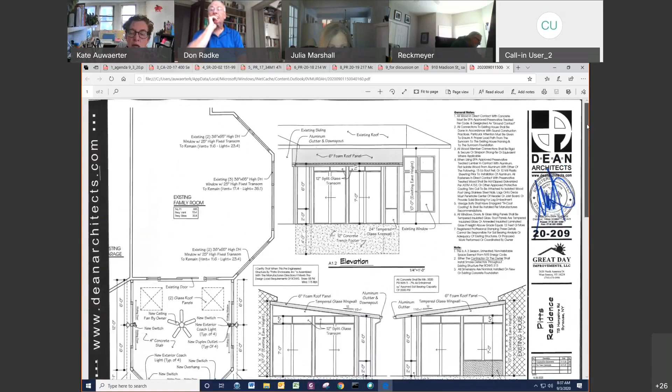This is the revised information that was just sent to me. I think the revision should be the A22, I believe, was in question. A22 is here, on the angle wall. Okay, there it is. Well, that's A2. That's A22 right there. No, it says A2. Oh hold on.

Let me move it down a little. Can you see that on your screen? You can't see the connection at the house. Can you see that on the lower left-hand corner? It's detail A22, sheet A2. Yes, we can see it. Okay, so there's A1. There we go. A2, and that's it, can you see it?

You can see A2, but can you zoom out a little bit because I can't see the whole drawing. Okay, I can't see A2 either. A22 is the detail, A22 is the detail. Okay, why don't we let the applicant walk us through it?

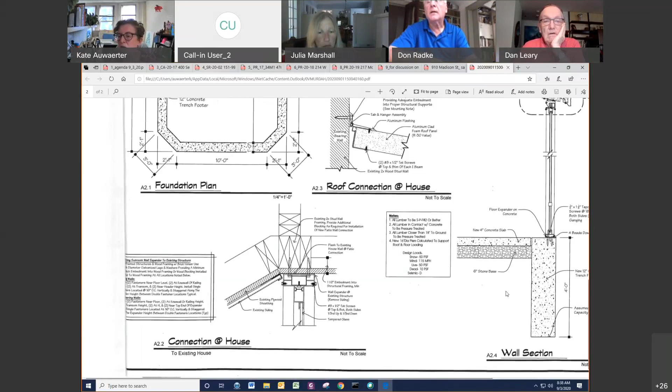Okay, well there was a question as to how we were going to attach at that angle wall. So this detail just shows that we're going to attach to the straight wall, and then it's just vinyl siding and everything, so we'll put flashing in there and bring the siding over to the wall. I think probably the question is more so, can we look at it in plan, not just the detail, but also the plan connection of where you're suggesting this is happening.

So these are the drawings that they submitted. I don't know what view you'd be looking for. Okay, well that shows it right there. Right here. Yeah. Okay, and the opposite end right on the corner. This is what we're looking at right here.

One of the questions is where the connection met, on the driveway side there was a sliding glass door there. Is that still there? That seems to be opening into an angle wall. It's not going to work. Right here. Yeah.

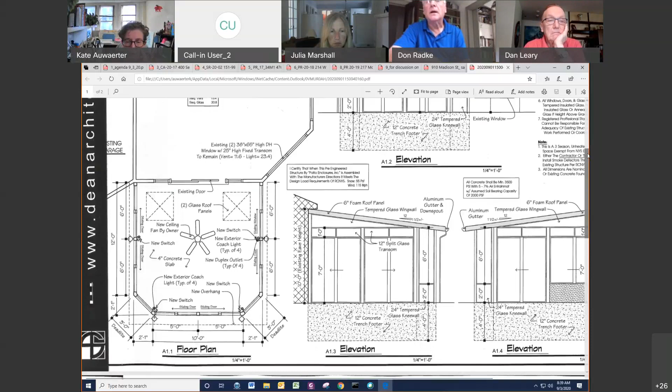Can you speak to that please? Yeah sorry, I had the mute on. Well, the door slides from the middle back, so the wall isn't on a super sharp angle, there's a whole patio they have off on that side. I see, I see, okay.

Is there a site plan? No, let's see here, the site photograph from last week. Yeah, there was one submitted, I know that. There was a site aerial.

I'm not so concerned about that connection, he's showing a good detail. It's really what happens at the roof line, the connection. Let's go to the overhang of the existing roof line. You had the detail there, let's go to the roof line. You have an overhang from the garage, I assume.

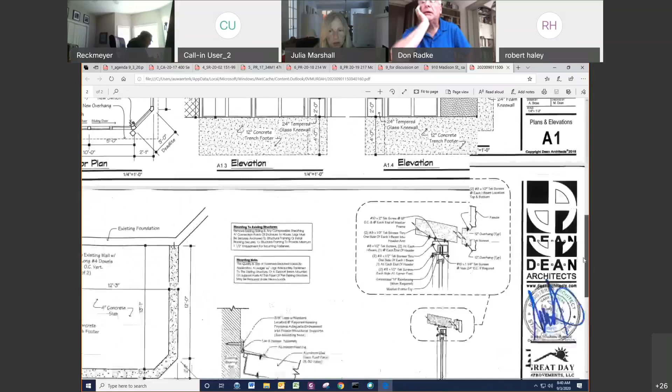And this is sitting underneath it. Yes, we're mounting under the overhangs, so our overhang will just get cut on the angle, so it ties into that roof, and then it all gets flashed. But we're under the overhangs, we're not cutting the overhangs off or anything.

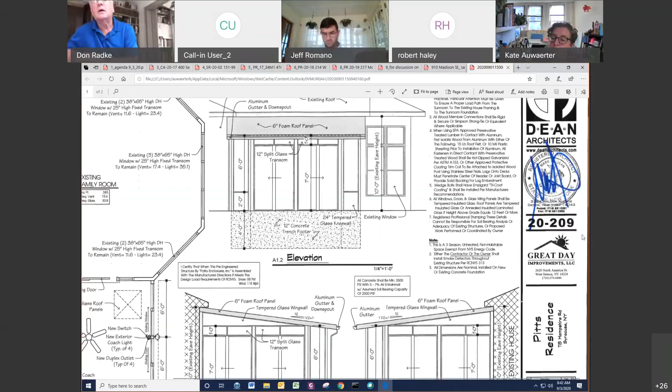Board members, let's discuss how this impacts the character of the house. Let's just keep moving on this and do our charge, which is how does this impact the character of the house?

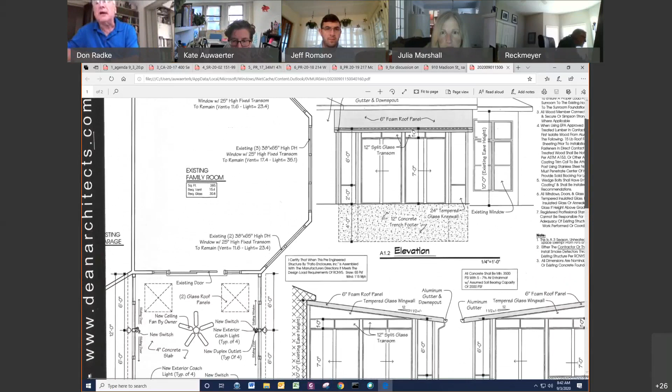I think there can be sort of a caution to the owner about the concern about that corner, but that's a caution, correct, and a caution would be fine. But in terms of the materials and the construction of this addition on the addition, well, the character of the house - I can state that this is inappropriate to the character of the original house in the sense that it's a prefabricated sunroom, and the materials and the shape and character of it is not in keeping with the original house.

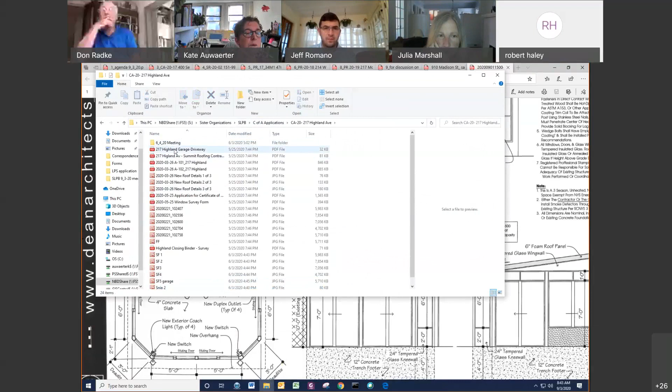Do you have pictures of the original house? Do you have photos that you could put up? Yep, please. Let's see here. I'm speaking to the applicant - is there vinyl siding on the house now?

I actually stated that it was vinyl, but I believe this is clapboard. I misspoke earlier, I said it was vinyl, but looking at the photo, it looks like clapboard. The detail provided shows the J channel as if it were vinyl. Oops, wrong application - here I am, 115 Hampshire, here we go.

This is feeling that it's inappropriate due to its material. Does anybody else have comments? I just want to see the photographs before - let me see if I can find those photos for you.

Yeah, hold on, I think scroll down in your file, it said photos. Hold on, let me see if this...

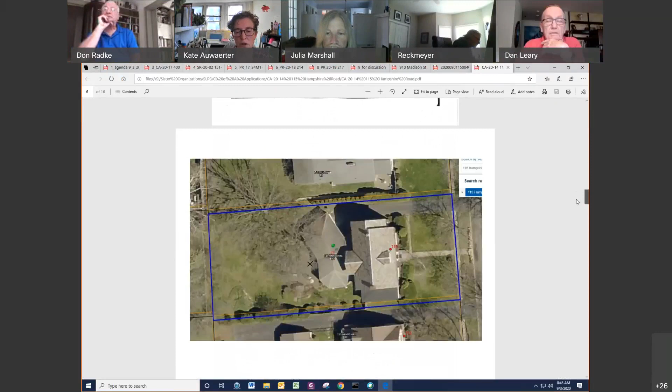I think it's not doing anything for the house, but the addition that was already put on there is much in the same vein - it's just to the rear, I guess I could put up with it. I think the detailing is very poor. I'm not sure why you even needed to repeat these angles over and over and leave the house alone out in front. It's been added to more than once. Exactly, I agree.

So we're looking at a clapboard sided house. And the applicant had said before, at the previous meeting, that the side wall, or the knee wall on the addition, would be clapboard rather than the foam paneling, so that at least on the other side of this it would be copying the same siding, using the same type of siding.

Go back to that other picture - this one? Yeah, okay. I can't hear you.

Speaking to the applicant - is the wall in fact... Don, you're garbled, I can't hear you. Can you hear me now? Yeah. Is the knee wall on the addition going to be clapboard? Yes.

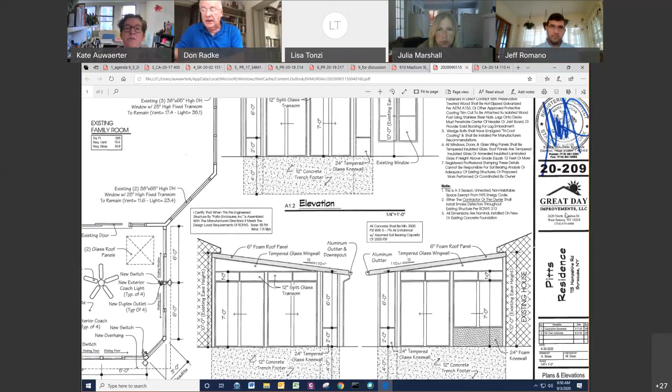Okay, moving on. Certificate of appropriateness, CA-20-17, 400 Sedgwick Drive, replacement roof.

Is that applicant on? Yes. Okay, I did see her, Kelly. As Kate said in her notes, we've got an application for a roof trying to replicate an original slate roof, but the existing roof is asbestos, not asphalt. Kelly, are you on the call? Yes, I am. I believe the current roof is maybe the original 90-year-old asbestos cement concrete composite shingles.

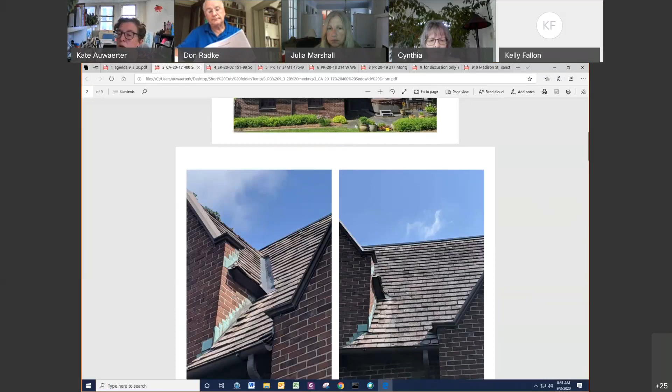They're in a state of decay, decomposing and breaking. One goal is to get rid of the asbestos, and we're replacing it with a tile that duplicates the architectural style of the slate look, as well as the coloration of that multicolored look that's now been faded and degraded. Here are the images. I believe it's actually this color, is that correct? Yes, that's correct. Page 2 of that PDF reflects the gatehouse slate color of that shingle.

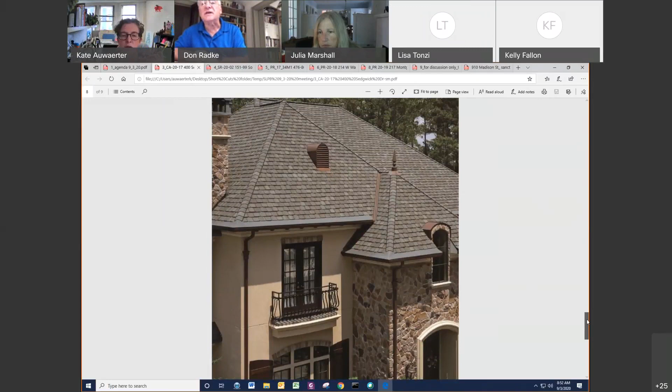Kate, could you go back to the existing roof? Could we get some close-ups there? My question would be, is that step flashing, the copper step flashing, remaining? Yes, part of our project plan is to repair where possible the copper flashing and replace where necessary with identical copper flashing. Good.

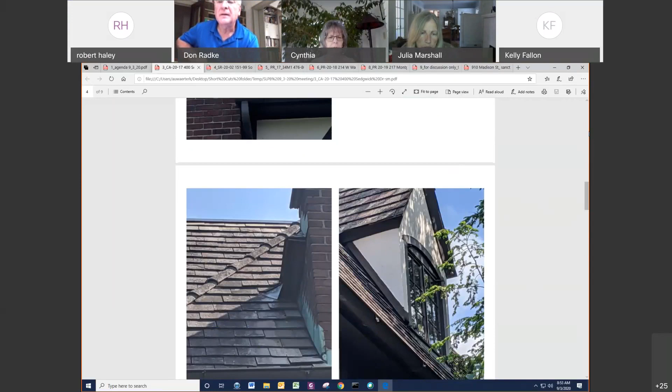Any other comments from board members? The only comment I would add is I think you should be very careful with the selection of the new match - including putting up a sampling of the new shingles laid right on the roof, and stand back and look at it to get as close as possible. You're going down the correct route, just be very careful to get the match as close as possible with this new material.

Thank you. It appears that the valleys on the existing roof are open valleys flashed with copper. Will open valleys be used in the replacement? Let me check the project plan here. Yes, copper edges of roof and copper valleys in all valley areas where existing, as part of the existing plan. Thank you, any other comments?

I'm looking for a motion. I'll make a motion to accept. I'll second. Any further discussion? All in favor? Aye. Opposed? Abstained? Motion carries, thank you very much.

Okay, we're moving into a series of zoning referrals. For the board's edification, our jurisdiction here is to comment - these are not certificates of appropriateness. The first one is a site plan, SR-20-02.

151-99 Solar Street. Is that applicant on? I think I saw Steve McKnight, are you on? Yes, I am on, Ashley from our office, and I am here. I'm hoping Vince from Keplinger Freeman is on. We're here as well. Oh, perfect. The floor is yours - why don't you let us know what's going on here?

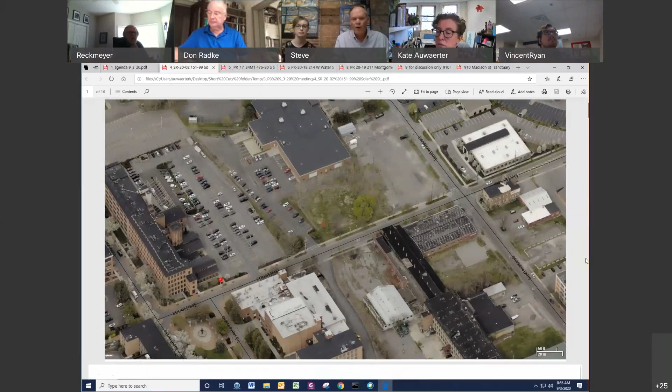Okay, first off, how are we going to do the drawings - is that us or you, Kate? I can give you control. Okay, let us get control. Let's see if I can figure out how to do that. Hold on, as I say every time - who's on the line? Who's on from Keplinger Freeman? Rudy and who else? This is Vincent Ryan. Okay.

Steve, have you taken control? Yes. Can you see our screen? Yep, you sure can.

I guess we'll start with the floor plans. First of all, this is new construction on an empty lot, correct? Correct. It's at the corner of Division and Solar Streets, kind of the north part of Franklin Square.

It's in the T5-2 overlay district for Franklin Square, the lakefront. The building is a 3-story build. We're going to put the plans up.

So the building is a 3-story building, about 18,000 square feet per floor, 55,000 square feet total. The top 2 floors are residential, with 17 units per floor. They're market rate units, 34 total.

The first floor is office commercial. The client is Rapid Response; Dave Pida from Rapid Response is the owner's representative. We haven't laid it out yet, but they'll be going on the first floor. Then there's a partial basement for storage and mechanical.

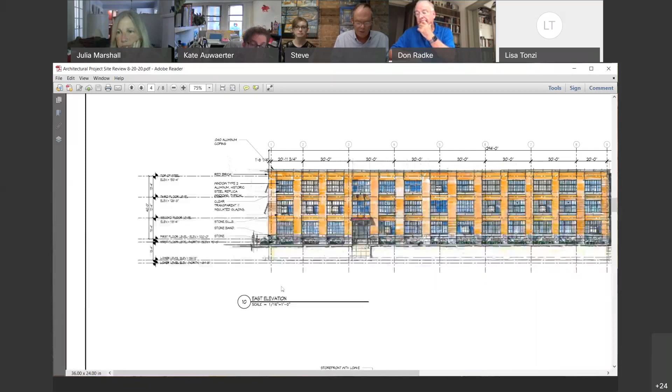The building to the south, which is to the left, we're using a historic replica steel sash awning window, a Winco or an FCO. We're using monumental stone and/or concrete steps with a suspended steel canopy above. The base is real limestone that we'll put on a sill, limestone base.

The window sills, we're exploring a stone, but it's quite expensive, so it'll probably be a precast concrete. We find both stone and concrete in Franklin Square.

Moving to the glass link, I just want to say it's not an atrium, and we're not using a curtain wall. I don't know which are frowned on by the guidelines, but it's rather a storefront system bearing on each floor. Moving to the right, those are single hung windows with storefront below, and we're putting exposed steel headers above the storefront. The windows on the steel sash windows are wider than they are high.

We find those, although that's flying in the face of the guidelines, we find the buildings, the precast and cast-in-place buildings built after 1920, most of the windows are wider than they are high. So we'd like to use that simulated steel, and we'd like some relief there if possible.

Flipping to the next page. Can you get the whole page up? This is just the north and the south elevations. We're showing the brick samples, which is the Glengarry I mentioned, and a limestone base.

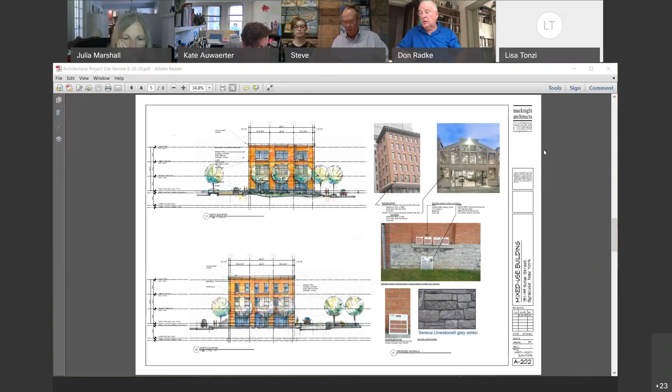Flipping to the last page. This was really just to show different windows that are in Franklin Square, in projects we've been involved with, and also that we're recessing the window. Typically the window will be recessed about 8 inches.

Just a couple of items: we don't anticipate any HVAC on the roof. We're hoping to use a geothermal ground source heat pump system for heating and cooling. As for signage, we haven't had any discussions yet with the client regarding that. We would hope to submit that when we get farther down the road. And that's about all I have.

I'd probably flip it to Vince if he wants to talk about the site at this point. Okay, that's great. Before we do that, hang on—I'm sorry, there's one more page.

Okay, let's go. These are transverse and longitudinal sections showing the layout where the residential units and commercial spaces are. The owner would also like a carport of some sort, and those will show up on the site plan with their locations, but we're suggesting a steel frame with photovoltaics above. Then the section off to the far right...

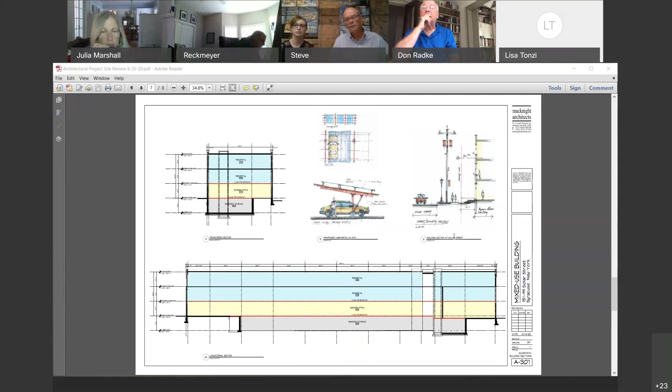Any other questions or comments from any board members? Did we want to see the site plan? Yes, yep.

Do you have the site plan there, Steve? Yeah, Steve, if you want to move it - I think Vince is going to bring it up. I'll have to get control here. Oh, there it is, I have it. Is this the right sheet you want to talk about? If you can go to either L2 or L3, it'd be fine. Okay.

So as Steve said, that's the building on the lower side of the parcel, running north to south. The parking lot will be primarily behind the building. If you could zoom in, Ashley.

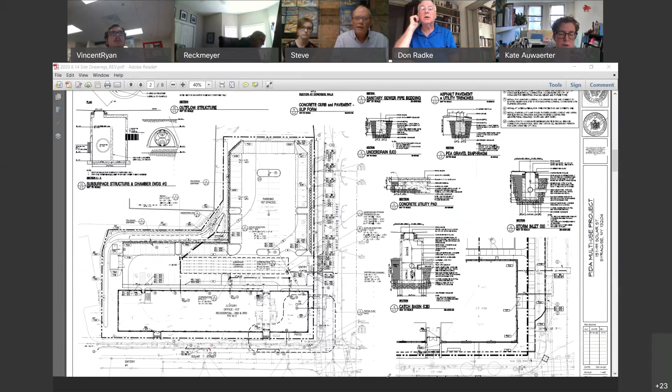Those solar structures will be on the north side of the parking lot. If I could request annotation - he's going to point. Solar structure here, solar structure here, here, and here. And then the rest of the carports will be the same steel structure.

Without the solar arrays. Stormwater will be underground, and everything will pitch away. And we've already, as Steve said, spoken to the fire chief, and we have approval on fire truck access and everything.

How many carports are there versus parking spots? The carports cover all the perimeter parking spots. I don't have the number offhand, but just to circle, these are all carport areas. Oh okay, so all the parking other than the center island has carports. Correct - the red areas have no carport, and all perimeter parking has carport.

Okay, I can switch to a different color here. These will be the solar ones. Oh, I see, so not all of them have solar. Yeah, there would be no point - there's no reason to put solar on the other ones, they don't face the correct direction.

And the high side of each of the carports in relationship to the sidewalk? The high side is just the opposite - you'd enter from the high side and then drain onto the grassy areas, so it's draining towards the property line. Correct. Okay.

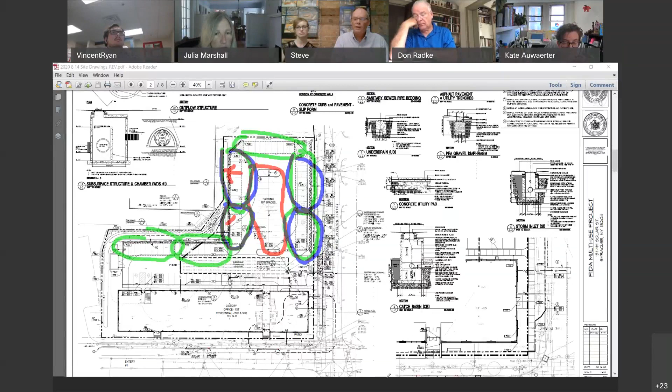I have a question on access. I see entry number 2 - is there an entry number 1 that I'm just not seeing? That's currently a mistake, we removed the second entrance, so the only entrance right now is this one, coming off Division. Okay, so it's an in and out, correct? Correct.

All right, any other comments or questions from any board members? Is there any landscaping happening in the back area towards the post office? It's not shown - if you could switch to L3, actually.

I had a question regarding the solar panels, if that's appropriate. Sure, go ahead. Very simply - I think it's a great thing to use solar panels for car shelters in upstate New York. I would recommend, however, being very careful about the detailing and color selection. I would suggest totally black panels with a black trim to reduce the amount of bright aluminum in your overall complex. What are your views on that?

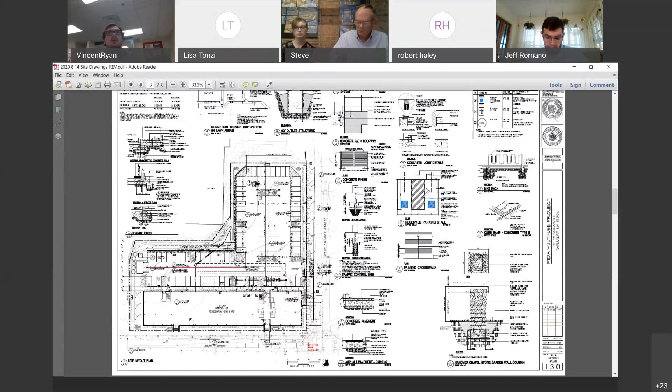To Julia's question, there is some landscaping in the two western corners. With T5, we're allowed to park pretty much up to the property line, but we can provide some landscaping along that western property line. Otherwise, the rest of the property lines do have vegetation.

Okay, yeah, I guess I would suggest it. I think it's a good idea. Is the property adjacent the post office property? No, there's kind of an empty lot, and then it's the post office. So if possible, add some landscaping. It doesn't look like you have a whole lot of space there, but it would be nice to have a buffer.

Yeah, we can get some stuff in there, not a problem. Because if a car parks and the headlights are going towards the other property, depending on what happens there at some point. Of course, yeah, we'll look into getting something in there.

Any other comments? Am I assuming that our comment is going to be a favorable comment? I would agree. I think that the fenestration of the building, the mass of the building is appropriate. Okay, all right, Kate, do you have what you need? The board is in approval of this? Not approval, but in support? In support of, yep. Thank you, guys, great project.

Moving on, project site review, PR-17-34M1, 476, 480 South Salina Street.

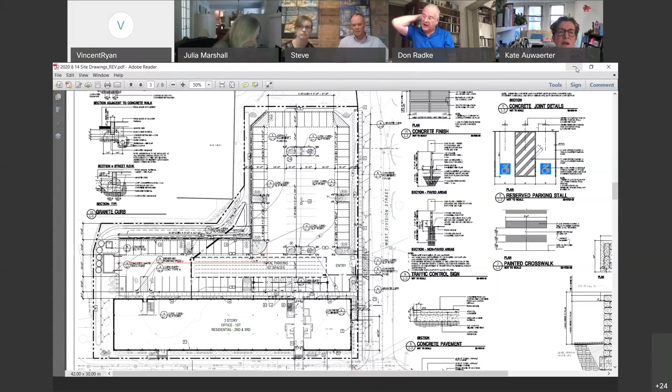This is a project that was in front of us before, and what was approved was not what was done. Randy Crawford is here to speak on behalf of the client for some mitigation discussion. Is that correct, Randy? That's correct. How you doing, Randy? Good, and you? Morning, everyone. Good. Let me see if I can cede back control here.

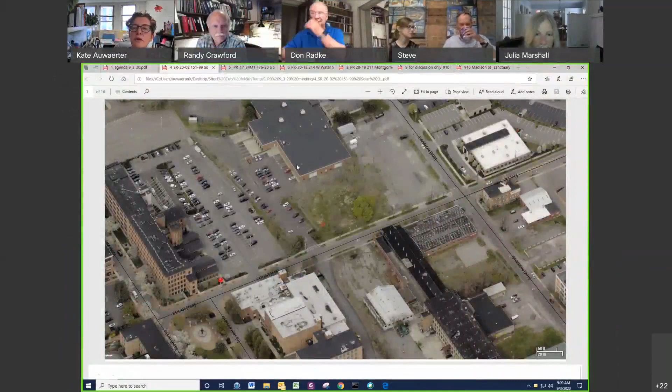Stop sharing as soon as you start sharing. Okay, here we go. Let me get, I gotta get to your, here we go. This is it. Okay, can everyone see that? Yep. Okay, Randy, it's yours. Okay.

Let me see. I'm not sure if you've had a chance to read the letter or any points made. The gist of it is that the owners got themselves into some hot water on a variety of levels, and they asked me to come in and try to help them get through it. And we've got Nick Altieri on board also for some code compliance support.

What Kate is showing now, does it read larger on your screens than it does on mine? I guess it doesn't really have to. I can make it bigger. That's probably good, yeah, that's great. Okay, scroll it down to there. Well, up, down, maybe, so we can see both elevations.

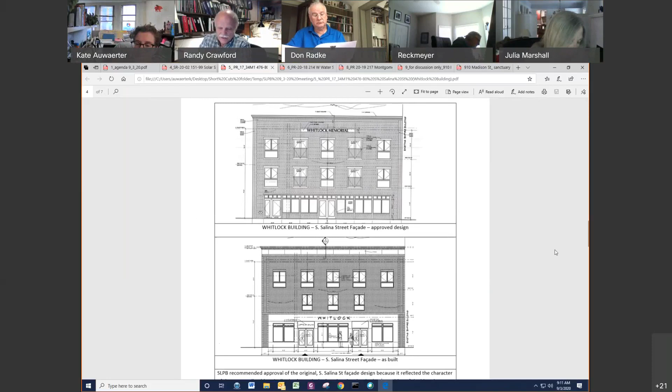Thank you. So upper is what was approved, lower is what was as built. We got involved barely two months ago when everything you see as built was already built. We've been dealing, as I said, with the code issues since then. Just got into the PSR aspects of it. I had to get explanations for a lot of the decisions from the owner, from Tom Goodfellow, not having been involved, and things are being kind of covered up by now. So I tried to outline it as cleanly as I could, including asks on behalf of the owner.

Looking at the rear, this is the front, so I'm going to shift over to the front reference. The board approved second and third floors of five windows, four of them with balconies, paired casements over single glazed up above. What they ran into was large precast panels extending up two stories on the front, trying to cut through those between the reinforcing in the panels and between the panels, I'm told, were beyond daunting, which is why they dropped out the left and the right windows on the second floor.

Similarly, the second floor windows were narrowed up because of the vertical steel in the two stories worth of original or previous facade, and found a three-foot high beam that spanned the entire width of all of those storefronts, which caused them to revise the height and location of their second floor windows. And then they brought the third floors down to be a consistent height.

For that reason, they have a different window configuration. The cornice itself initially was fairly narrow. What they ended up doing was put a taller one that mimics, though not necessarily intentionally, the terracotta ones that you see on other buildings up and down the street. They do have their little bracket features, which do not show on the as-built elevation. Those are painted a dark color, dark brown, black, and really stand out awkwardly, I think, from the creamy, almost terracotta color of the rest of the cornice. So our proposal is to paint those brackets and blend them in with the terracotta cornice treatment.

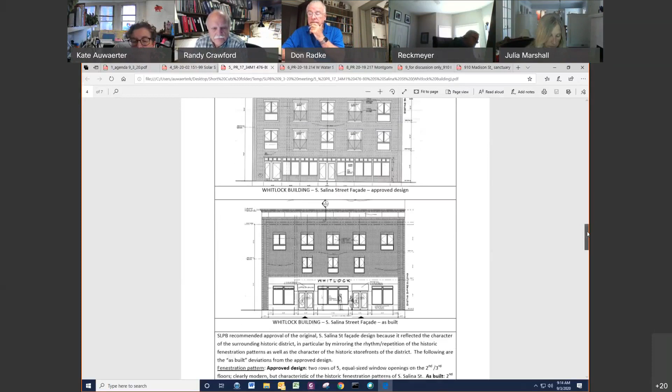Yeah, there you go. So that's the typical treatment. I mentioned that 3-foot tall beam going the full width. That forced them to put the second floor windows higher than initially intended, which would have left a pretty wide bare brick space between the window sills and the top of the storefront.

So they went ahead and did what they were seeing on other parts of Salina Street. They put a band across the top, a paneled band. The Whitlock name there that you see was originally approved to be up just below the cornice. They now had space where they could take that down, since most of the buildings downtown don't have names up high on the facade. So this made it a little bit more consistent.

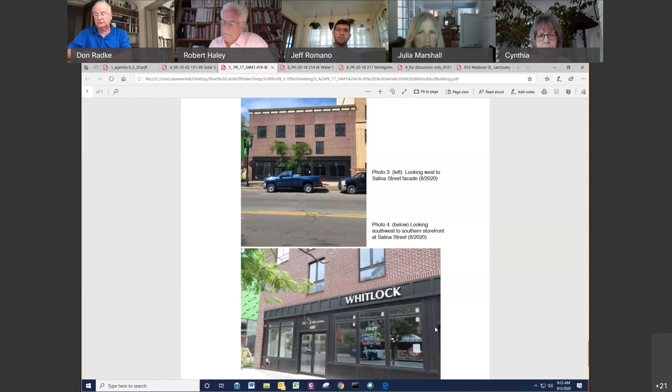Okay, so that's the second comment on the as-built facade, which I would agree with. Yeah, I also ask, it looks like, it appears from the photograph, you think this is not real brick, this is thin brick? Correct. It looks... what's going on above the third floor windows where I'm seeing different colors, and it looks almost like it's panelized?

Yeah, it's very inconsistent. I honestly don't know anything about that. I can see what you're seeing in the photograph, and I can ask him if there's any reason for that.

I don't have. From a construction point of view and from an aesthetic point of view, that's totally unacceptable from my point of view, because it looks like it's a different color, different type of brick. It looks like it's been patched. Yes. Okay, so our comment on the front elevation is that we would not have approved this as-built for the specific, to start with, for several of the specific reasons that we just mentioned.

Can we also go to the drawings again to look at what was approved, because we've not even mentioned the windows on the first floor. Right, the windows, the doors, and the transom. And the balconies.

From my point of view, the lack of the balconies doesn't detract as much as the rhythm on the storefronts. Agreed. And the rhythm of the windows, as well as the door openings and their position.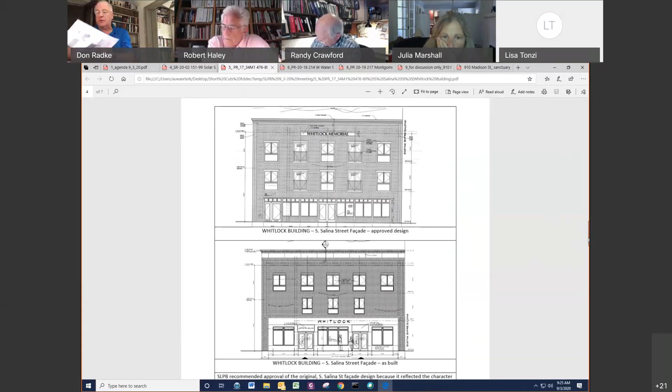Okay, so our comment is we would not have approved the as-built for the reasons we mentioned. To move this along, Randy, can you go on to the other elevations?

Sure, you got the drawings here. You can probably grab a quick mental image of the drawings of the approved version, and then shift over to the two shots of the as-built photographs.

So what they have here is the upper sheet. As I said in the letter, they moved the two entrances in towards the center so that they could accommodate two separate tenants if need be. They had an incident of vandalism fairly early, and for that reason they raised the bottom level of the storefront glazing, which I'm afraid you can't see very much in this shot—you can just see it peeking out between the trucks. The one with the most jarring is the lower shot.

If you can scroll up, the baby blue in there—this is definitely not what was approved. It was approved as the face brick, and there was a different configuration to the storefronts and the doors.

Expeditious request was to paint it charcoal gray, so it just drops into the shadows. After that, the owners will need to hear what the board would prefer to see.

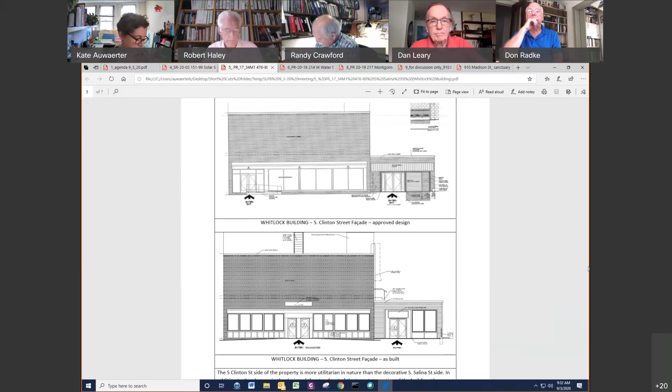Agreed. Thanks, Don. Okay, anything else? Randy, you were put into a tough spot there. Thank you, Randy, I figured it out going in. Listen, thanks for your time, everyone. Kate, some comments will be coming back that we can give to the owners. Good to see you, Randy. All right, you guys too. Thanks, keep it up.

Bye. Okay, moving on. Project site review PR-20-18, 214 West Water Street.

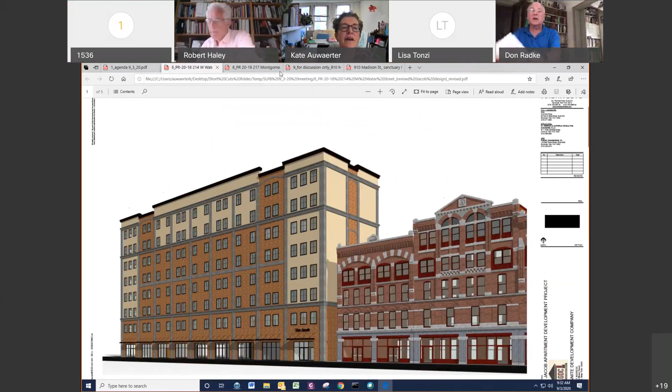Mr. Trasher, are you there? I am here. Good morning, board. Morning, morning. Kate, do you want to give a summary first, since I know you have some clarifications? Could you just go through that? Yes, I can. So I'm asking Kate to talk about the notes that you sent out. Could everyone mute themselves, there's a lot of feedback.

Just so you all know, the background is that the plans were approved in early 2019, going through the planning commission. However, due to circumstances, the project didn't move forward within a year's time frame. During that time, there were some alterations to the design, which I outlined in the staff report. Zoning's recommendation was that the changes were substantial enough—in size, in some materials—that they wanted a brand new, fresh project site review rather than a modification to the original application.

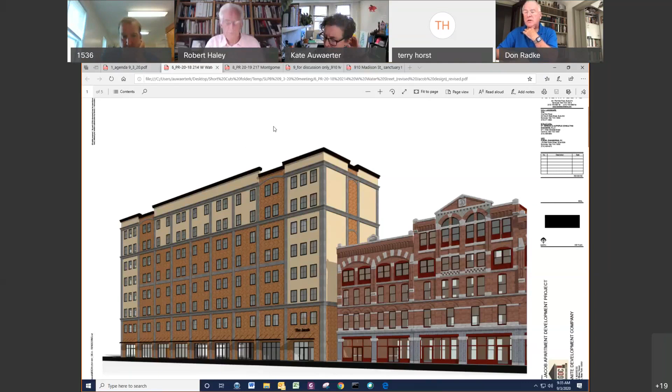Yeah, or do you want us to share our screen? Brian Bouchard is on the phone too. Why don't you go ahead and share your screen, you can do that. Yeah, there we go, perfect. So then we can walk through it—that's where we are right now. Board, project site review. Okay, Chairman, you want me to go through stuff now?

Yes, please. Okay Chairman and board, thank you for having us. As Kate said, since we got the initial approval from your board and the Planning Commission, things have changed a little bit in the world we live in. Going through the economics between contractor, equity partners, etc., for the 10-story building previously approved, our request is to go down to an 8-story building. I'll just reorient you: Erie Boulevard, Franklin, Water. The footprint is the same, though a couple of components in the building have changed.

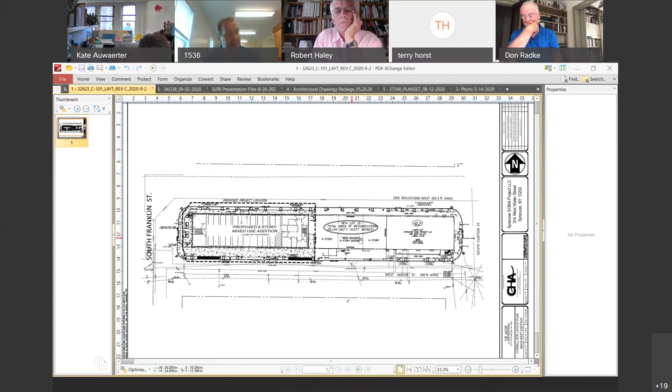The initial numbers we got from the automated parking folks budgeted us out, but when we went through the final construction numbers, their numbers ratcheted up significantly—we were at $15,000 per space, and then they went up to over double that in construction numbers. So we've come back and are proposing a single ground floor level of parking in this area. We would still have our lobby coming in off of Water Street leading to the residential pieces, and on the end of the building we would still have retail spaces facing Franklin. Our curb cut is on Erie Boulevard.

The plans that were submitted mistakenly showed a connection to water, but through all the past conversations that was just lost in conversation between our office and Tim Bivens, who is now the project architect.

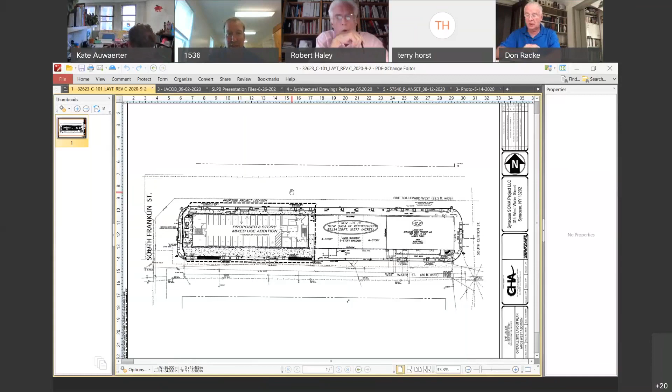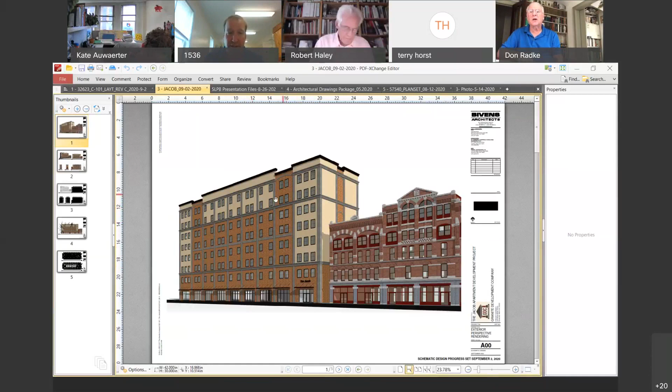So Brian, you want to flip to the elevations? The elevations look very similar to what they were previously. There was a change in building material. The light color used to be a Alucobond panel, but working between the structural engineer, architect, and the waterproofing of the building, it was determined that the interface between the brick, the concrete, and horizontal components of the project had some tough waterproofing issues, and it was determined that an entire brick building would be better. So we have two different colored bricks, same window treatments, same cornices, all those other things that you went through previously with our design group, we have implemented.

So we're back here to get your feedback and comment. We look forward to hearing what you have to say. If there's things, I have a question.

Go on, can you scroll back down please? Okay, if you're looking, I'm curious, can you see my pointer or no? I'm trying to, why on the top two levels does the brick not extend all the way up to make it look like a panel rather than a cutout at the top? Does that make sense? Are you right there where the hand is right now? Over to the left a little bit.

Yeah, why are those two floors in a different material? Why is the brick not extended all the way to the top? I guess is my question. You're talking the roof cornice line or where? Because the entire facade is brick.

Right, the color maybe then is what I'm talking about. The color is the same color treatments as before. There was talk about the verticality and the horizontal run. So the last time we were with the board, this is what was decided upon in terms of the look that they desired, for massing and scaling of the building. So we came up with this with you guys over multiple meetings a year ago.

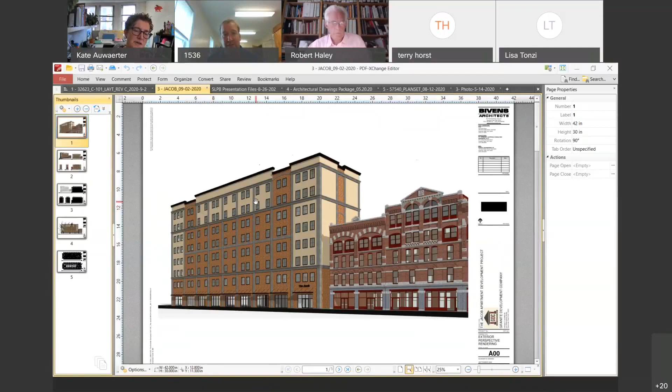And I will say, one of the things that's there because of building code, we did have windows and balconies facing Clinton Square. We had to remove those, going through stuff with Chief Davis and the codes department. They put us into a building code violation where we would have to go seek approval from the state board if we were trying to have windows in that location. So it was easiest to remove, and we continued the same treatments on those ends, minus the windows and balconies.

Okay, one thing I just want to go back to, this is Dan. I think I heard you say that the curb cut entrance to the garage is on Erie Boulevard, not on Water Street. Correct. Yes. Okay, I see it right there. All right, and it's right in the middle.

All right, any other comments by any other board members? Oh yeah, just to- go ahead Bob, I'm sorry. How are you handling the street level facades of the parking garage on both sides? We've continued with the windows.

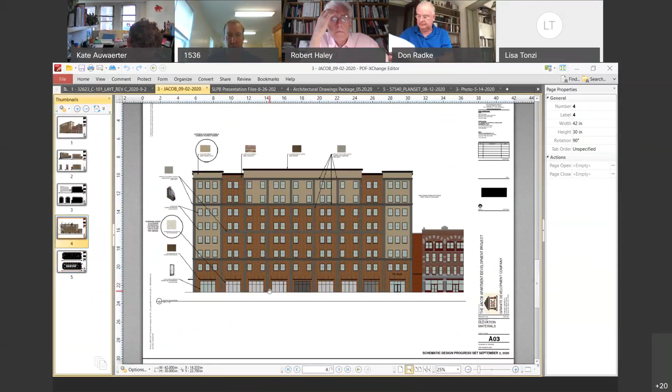And previously we had an area where there was a walkway behind where you could change and put like, I don't know, mannequins or stuff in the windows. We would still look to make those areas aesthetically pleasing. Right now they've gone to screens to eliminate mechanical ventilation. So we do have this area with window treatments and screening in between, if you're looking at this parking space 11 and 21 and 1 and 10, because of trying to eliminate the mechanical ventilation system.

Well sure, can I ask another question? I mean, this is an area of significance obviously to your building design, and you do need, I think, 100% screen. This is an area where your design detailing can do interest in your screen technique. It might be a pattern at the lower level up to your transom height, but you said windows. You don't mean glass windows, do you?

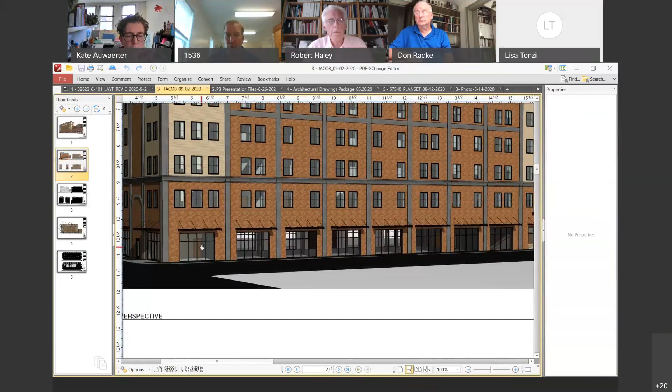No, on the end of the buildings with the retail in the lobby, we continue with the storefront windows. And then in the middle, a pattern that is consistent with the storefront windows, which would be screening of the vehicles. Well, that would make sense. If your mullion system stayed the same, that would make sense. And then the infill screen patterns, there's so much you can do with design screens that will give that interest for pedestrians.

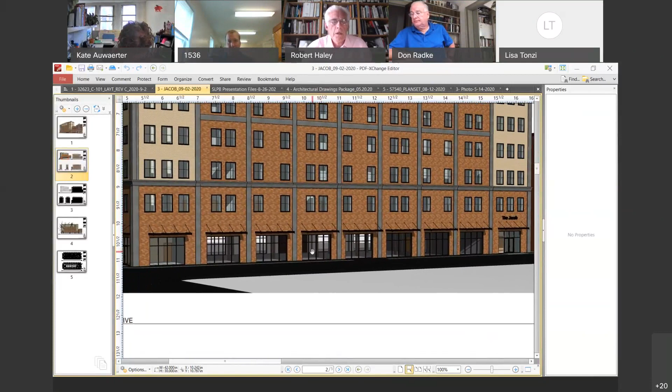Right, that screening is going to be open screening, correct? Yes, it's apparent, they'll need a larger area of ventilation. But I mean, that's an area where your project can take a significant step forward to enhance the pedestrian-scape of those parking garages. I highly recommend you put some serious design thought into those screens on both sides. Secondly, the overhangs, the sunscreens that are there aren't really needed, however they're a visual interest. So I would just spend your design time there in terms of that street facade. It's very important. Sure.

Regarding the screening, if you were to look into those spaces, what would you see from the sidewalk? Cars.

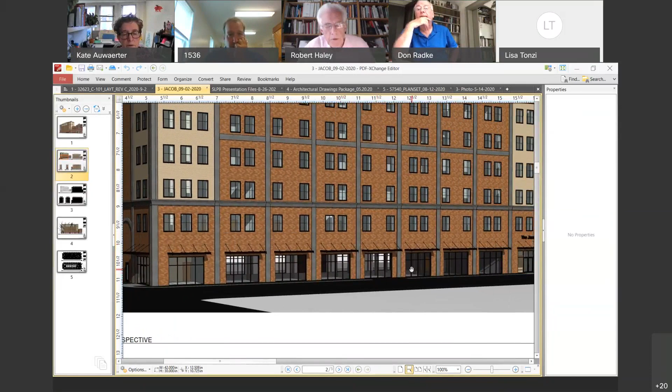I have a real problem with that. This is a residential area. This should be a streetscape that is pleasing, beautiful, with plantings and things that people will feel good about. If I walked by and looked over and saw cars, I think that takes away from the beauty of the area. That's my comment. No, that's a very good comment.

The screening does not have to be 100% transparent or translucent. You need it for ventilation, but a percentage of 50% opening or even 80% opening can still have a pattern in the screening with stamped metal panels, not just wire frames or wire grid frames that change the transparency. At nighttime, the light level should be low enough not to be a blazing white garage - high enough for security and low enough not to be a white mercury vapor type of parking garage blasting people off the sidewalks. It's a very important area.

So it would look similar to the building on the corner of Fayette and Franklin - when you walk by, you look to the right and you see cars, and you see parking spaces.

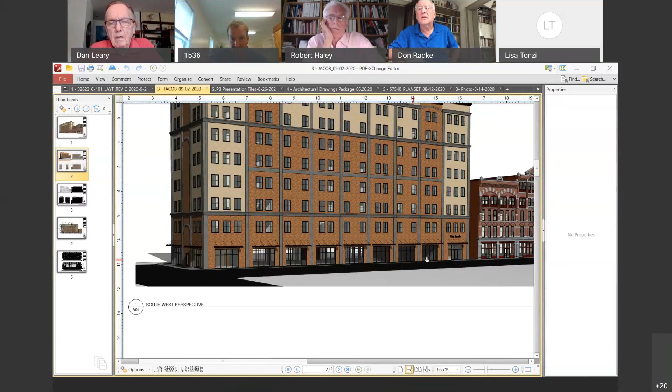Dan, were you going to say something? Yeah, just for clarification, the drawings appear to show a different treatment on 3 of those 7 openings in the center portion. Are they all the same? Yes, they're all the same - it's just the drawing. Where you see through the building, the first 4 on the left you see through to the other side, and on the right you see the core of the building, in shadow, but the treatment within the opening is the same. Correct.

And I agree with Bob - there are a lot of things that can be done with the screening to mitigate the appearance of the vehicles. Also, nobody's mentioned anything about landscaping outside, which doesn't affect the ventilation factor at all.

And that is screening. Well, I have a question about datum lines in terms of where those sunscreens are located. It appears like the construction point, or the cabling back to the building from the sunscreens, is the only thing that aligns with the building next door in terms of a datum line. We had lots of discussion about how the geometry and datum lines of this building were designed, and something's changed.

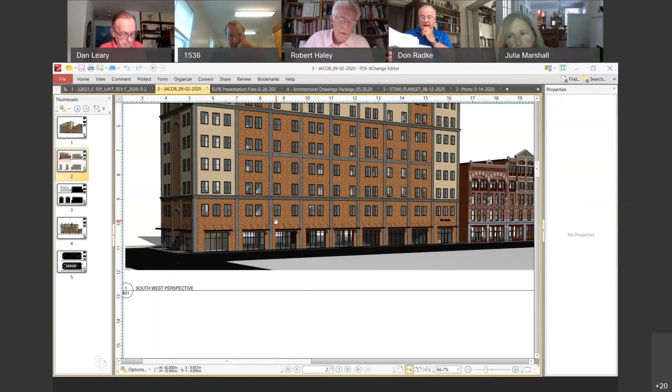Are you saying - do we have the original of what we approved? Yeah, that's in your packet. I didn't get the packet. It's only on the computer, I don't think. What we have here is what was previously approved. Hey, Brian, do you have access to that? I'm trying to pull it up right now.

Julia, what's your comment again - that the building's not aligned with the adjacent building? Well, if you're trying to align that datum line at the first level and you're using the sunscreens, it's not working for me, because the only thing that kind of aligns is the cable that comes back to the window. I'm confused by your comment. I'm looking at the building's footprint aligning with the adjacent building's footprint.

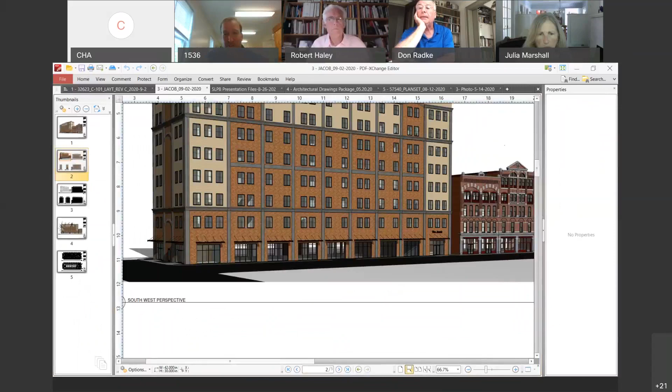So Julia, we just brought up - Brian Bouchard in my office is going back and forth between the previously approved version. Can you put them side by side, or top and bottom? Well, there is no datum line where Julia is talking about - in the approved version, I see what you mean. Right, that's what I'm saying, we lost that. The sunscreens are over the window, and I think we were higher before. I see what you mean. Yeah, you're talking about elevation. Yeah, thank you.

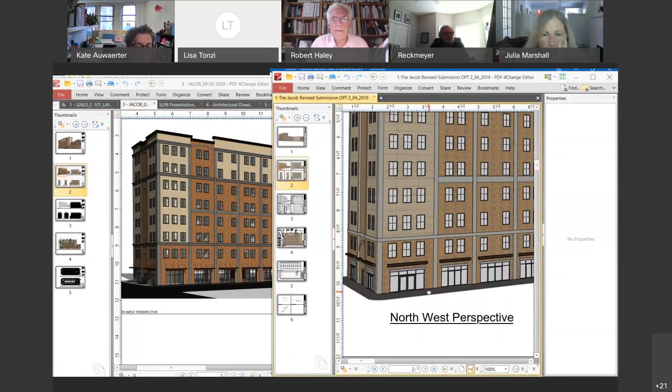Okay, there's one - if we can get the one on the right, then there you go. And that northwest side, can we go to the other side of it, where it meets? There you go, perfect.

Yeah, I mean, it makes an attempt at it, but it's pretty weak. I think it's too thin, it's too small.

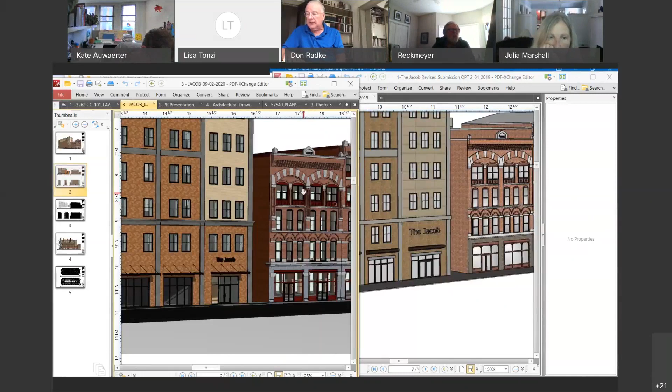While we're pondering that, I'm looking at your eastern elevation. Leave that up there, you don't have to go there because we've got drawings. The eastern elevation where you took out the balconies and the windows, and going back to Lisa's earlier comments about the color of the brick in various locations of this elevation. There's something that just doesn't read well in the light patterned, light colored brick on the east facade.

And then the amount of light brick on the top two floors. It just, I don't know. Ryan, can you go to that? Well, let's leave that. Okay, can you leave that? I just want to throw this out to the rest of the board.

In the new plan, there is a lot of light colored brick. And Lisa mentioned on the south elevation, the amount of light colored brick. And I'm also adding the eastern elevation and the light colored brick, and then the western elevation. Just wondering what the rest of the board thinks, if that should be dark colored brick on both east and west end.

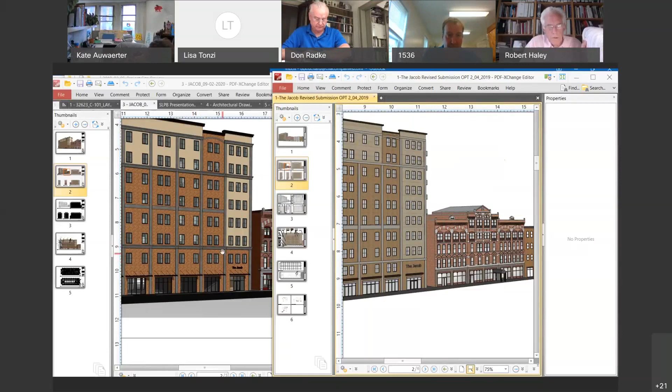Makes no sense. Yeah, at least you're... that would be, it would... Yeah, I agree with that. Agree. Yeah, I agree. Lisa, I'm sorry for interrupting. Go ahead.

Thanks. I've been looking at this, we all have, seriously, for a long time, and I think Lisa's instincts are correct, and Don's also. The artificiality, or the seemingly arbitrary light dark patterns, are a concern to all of us. I know that when your application came in as an eight-story building, I was immediately pleased that it was shorter.

And as I began to look at this possibility, I also relooked at these light brick areas. I think based on the building massing in your current application, that if we took out all the light brick below the 6th floor line and went to a full block building of one brick, looking more like a warehouse of the period, the upper level could be completely light for the whole area. And it would look like what was done through the period.

In the sense that sometimes buildings had additions, just like the building that Kate's in. It was actually a 3-story, 4-story building, then 3 stories were added on top of that. So what I'm advocating for is a consideration of the light brick not looking so arbitrary - and that's an unfair word. But if the entire first six floors were all a dark color brick, and the entire upper level were all light color, it comes into the block massing of original construction of this period. That's my suggestion. Why don't we do this to move on, because we do have a long agenda here.

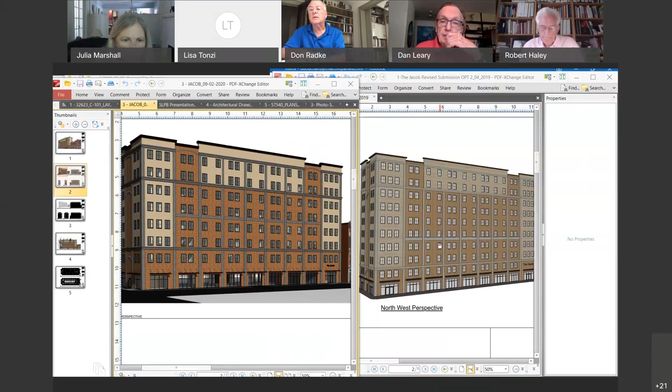Okay, all right. Well, then our comment, since this is a comment, we'll comment in the conditional affirmative, and see if the board agrees with this. They're stating that there is some discussion about the brick coloring that we would like to continue to have, and that on the first floor, north and south elevation, we want to see a much more detailed treatment of that screening and any planting, and possibly strengthening that datum line.

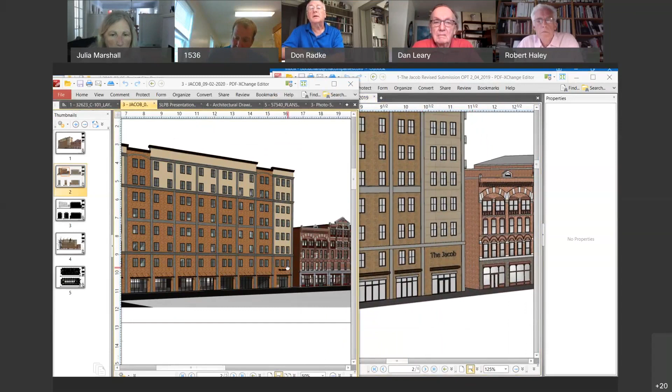Okay, can I add - it's not just the datum line over the first floor, but I think also look at the relationship of the datum line just above. Okay, so the datum line at the first floor and the second floor, Julia? Yes, please. Okay, first and second. Okay, so Kate, do you have that?

I just want to make it clear, I have a dissenting vote. I would be very pleased to see a 7-story building and not an 8-story building, being a substantially better project for this block. I also think that, to the developer's side of this, I realize the cost issues, everything that you're dealing with. But let's not have to go through this again for another reduced building. Maybe you want to consider your final application being this one as a 7-story, not an 8-story project. That's just a comment, that's just one board member's comment.

Okay, because we did approve a 10. Okay, yeah, but I didn't disagree with Bob.

I think a 7-story building would change the appearance significantly. Yeah, I do too. I'll say that I greatly appreciated the reduction in height of the building along with its massing.

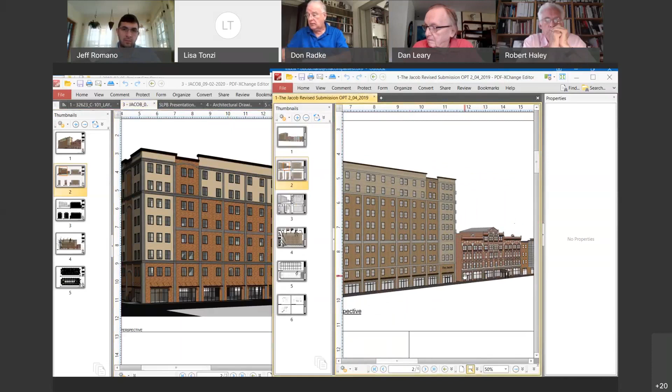Don, may I make one more comment? I promise I'll leave it at that. I really want to push my concern about the first floor. If you go to the Amos building itself, that block is beautifully done in the front. All the spaces are well decorated and very clearly pleasing to the eye. I don't see that in this addition.

Right, and I agree with you, and I think the entire board agrees with you, Lisa, that the first floor treatment with the screening and the planting has to be addressed in a much better way than it is.

And that corner too, Bob, down past the parking area, we have no idea what that's going to be - right there where you have your pointer. Yeah, that's a retail space. It's retail space. Okay, and that's both corners - Erie and Franklin, and Water and Franklin - both are retail spaces. All right, just want that for the record.

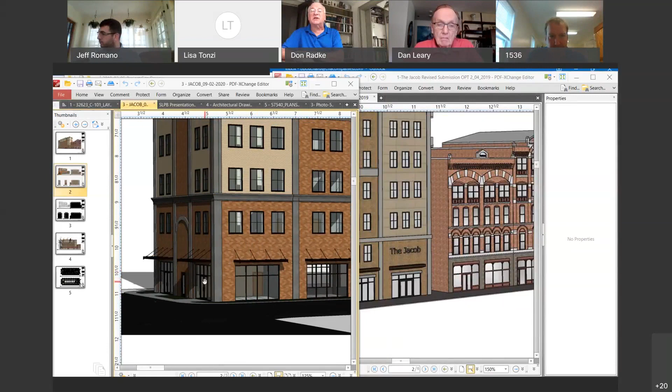Thank you. But the board is very seriously concerned about what's going to happen on the elevation, on the water street side and the parking lot. We don't like what we see here, and we have to see something more and better.

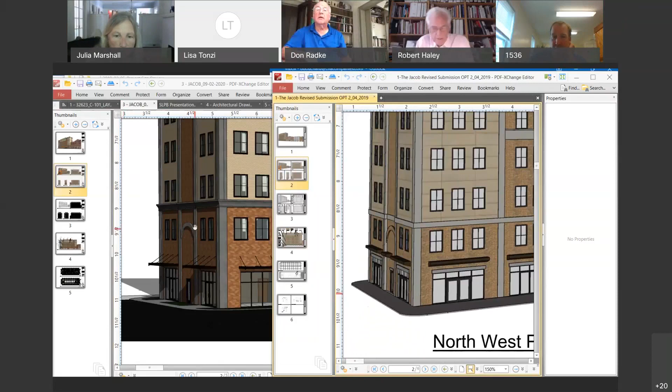Don, can I say I'm also concerned about the end elevation? We haven't talked about it much, but the relationship of that one arch to nothing else on the building - I think it's probably a nod to the Amos building, but it seems arbitrary. That's a good point. Yeah, there's one above it and on the east side as well. And now that the awnings are just over the windows, it makes for an uncomfortable look. It's not necessary.

Well, I'm looking at the door in relationship to that space, and they need to just take a look at that. Okay, are those your comments, Kate? Yeah. All right, so Kate, can you get those comments to the applicant, and hopefully we'll see something more.

And we want - okay, so that's my question. So what the board is asking is for the applicant to come back maybe in two weeks at our next meeting, if that's possible. Whenever we do want the applicant to come back. Correct. All right, with a design that includes more detailed information about what's happening, in particular on the ground floor.

And then addressing - if possible - presenting a couple different color schemes based on what has been suggested today, so the board can get a feel, that would be really helpful. And then also, of course, we're talking about the datum lines and the arches. And then finally, those arches - whether or not they're a necessary component for those conditions.

Okay, can I just add one thing? To be fair, it's really hard for us to assess the colors of the masonry from the renderings. We really need to see an actual sample in terms of color. That's the hard part about doing this on WebEx - we're looking at a color rendering, and depending on your screen, the color could be completely different from what I'm looking at.

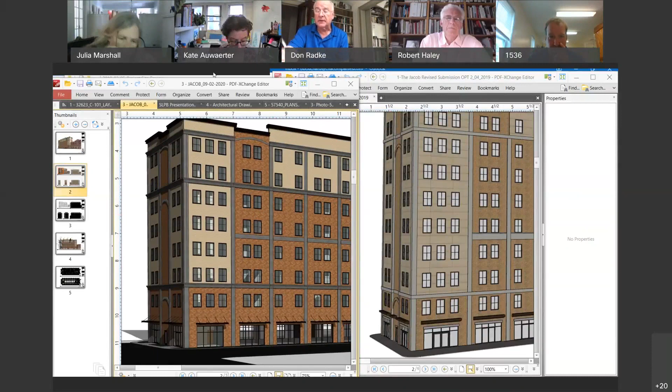This building was built almost 100 years ago with one enclosed fire stair in the center. It also has one fire escape ladder down the center inside corner. Right now, that ladder extends down to the roof - you can see the roof of the second floor in the back. It extends down there, and then you traverse the roof and come down. They used to come down a ladder in that back corner.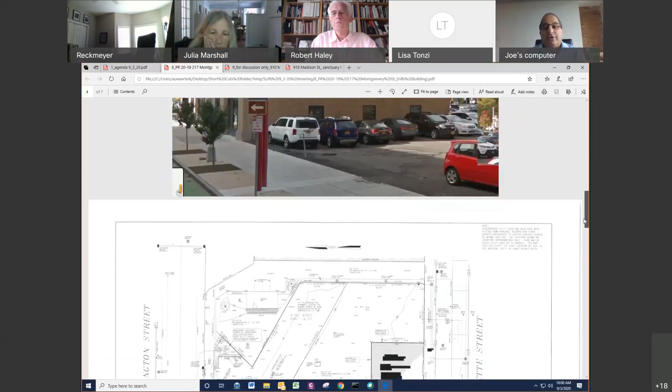The ladder was removed. We do not have any photographs of that ladder, but we know it was there because the bolts are still in the wall in the back corner. So we wanted to replace the ladder, but the City of Syracuse Building Department asked us to put a stair in instead because the code does not allow for newer ladders. We want a stair to grade there, even though the remainder of it from all the way to the top floor is currently a ladder.

So we designed a very simple 3-foot stair. We tried to keep it simple, and it comes off that second floor and traverses down towards Fayette Street.

The owner owns both properties. There are 2 separate properties. The building is on one property, and the parking lot behind it and on the north side is owned by the same owner. So he has created an easement to go with the building so that they'd always have this egress to the public right of way. That was my question. Has that easement been filed and accepted? It has been filed, yes, and it's part of your packet. So we ask your approval to continue this fire escape to grade.

Can you go back to the picture of the building? Sure. So with that, there would be no changes in window openings or covering of window openings. It looks like it would just fit right between. That is correct. And go right here.

So what are you doing about covering and snow removal and all that? Well, we try to keep it simple. In all the years we've had it, no one's really ever gone down that ladder all the way down, so it's really not used. It's unfortunate reality that these things are not shoveled. It's typical, and I just didn't know whether you would consider a roof over it, a shelter of any kind. Is there going to be an open tread, a metal open tread? Yes, there would be a metal grating so that the snow and rain would go through it. It would not be a solid tread. It would be similar to a mechanical system stair. I would prefer not seeing it covered, just leaving it an open stair and as simple as possible.

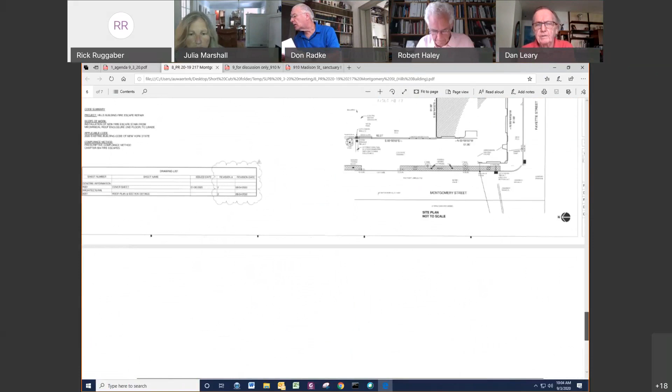Just one question, Joe. It looks like the height of the railing going down the stairs is 3 foot 6 inches, and the intermediate rails are set between that. It appears there are 2 intermediate rails. Would you consider, just as a safety issue, going to a 4 foot high top rail with a 3 foot high handrail that was unbroken by the verticals?

Yes, we could consider that. I'm just wondering why you're saying 48 inches, since usually guardrail height is either 42 or 44. Okay, so you're saying you'd like to have a guardrail height all the way down with a handrail on the inside, one that is not interrupted by the vertical members, interior and bracketed out? Maybe you already have that, but it doesn't show it that way. No, it isn't. It's a simple 3-pipe rail design.

You might be required to do it as a guardrail plus a handrail anyway by code. Yeah, I think so, it's possible. As a fire escape, we're not, but as a stair, I think you might have to do the guardrail anyway. I believe 42 is minimum for the guardrail, and then handrail at 36, but don't quote me on it.

Check the new code, we can do that, but in the existing building code, it's very specific on what a fire escape has to have, and we've met it pretty much. It only needs to be 22 inches wide, we're making it 36 inches wide. All the risers, runs, and treads fit within the code. In the existing building code, there's a whole paragraph on fire escapes, and we've designed exactly to those standards.

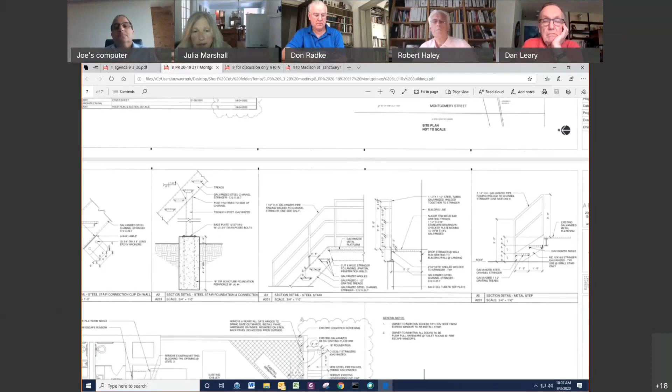We would definitely consider that, and we can make that change for sure. I guess the only comment I make is it comes down to semantics. So this is being considered a fire escape, not an exit stair? Correct. Okay, I'm not going to go back and look at the code for you, but the code issue is the applicant's responsibility. Exactly, concept and scale and size and material, the board is okay.

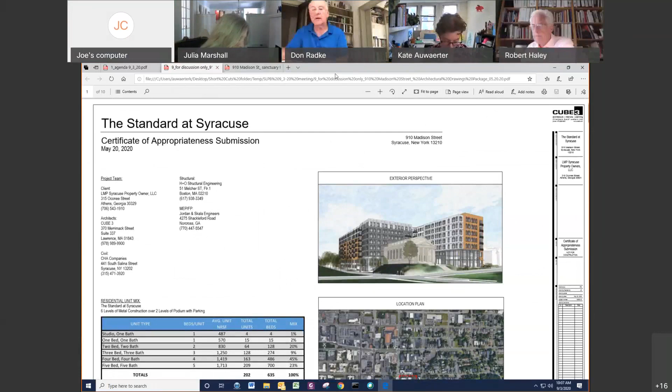Thank you. Okay, so now we're at a pre-discussion development meeting on 910 Madison Street. Who is here for the applicant? Kate, who is online with James Trasher. James, anybody else? Yeah, I got a whole group of folks, so I'll introduce everyone. So does Kate need to introduce anything, and then I can get going?

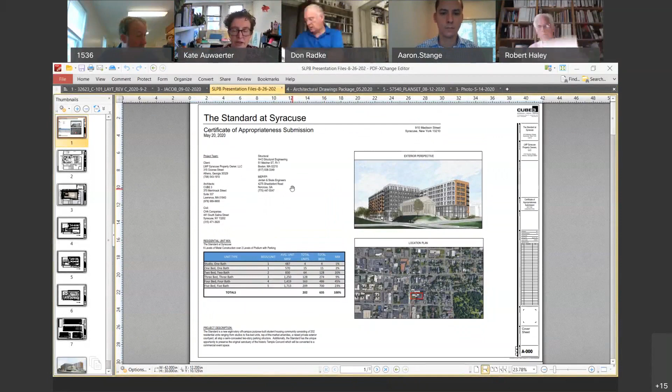No, as Don said, this is really just the first discussion on sort of the conceptual level of what's being proposed, and the actual C of A will be down the line. The decision on the C of A will be down the line. So you go for it, James.

Okay, so board, thank you. So with me from the development team, I have Mark Riley and Aaron Stange. From the engineering side, it's myself and Brian Bouchard from my office. And from the architect, we have John Harding from Cube 3. I'll give a brief, and we respect your time here, we're at 10:10, it's been a long meeting. So as Kate has said, this is the first of many, and we just wanted to do this to reintroduce.

So we're going through 2 processes right now on this project. We have an application in to the city for some variances with the Board of Zoning Appeals, which will be handling those approvals and the SEQR process. In conversation with Kate and Heather Lemondola, it was felt to just have some preliminary conversations with you right now. And then once we start the ZBA process, we'll be back to you for the formal certificate of appropriateness.

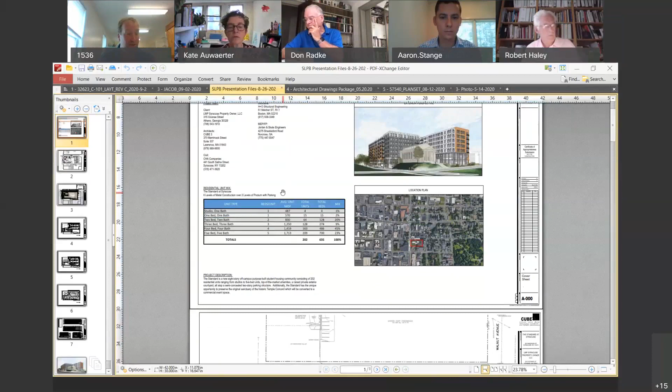Just to refresh everyone, at Madison and University, we spent a lot of time with you before on the local historic stuff, and the determination was made that the sanctuary was the locally historic protected piece. And we will work through the process. So we are preserving the sanctuary and proposing to add a 7 to 8 story mixed use residential building with subsurface parking on the project.

I'll let the architect speak more to what's been done in the design elements. We've provided new sidewalks, landscaping, green areas, preserving the sight lines from the intersection of Madison and University to the sanctuary. We've tried to make it ADA accessible with multiple entrances. We're working with National Grid on the utilities on Madison, the fire department on emergency ingress, egress, and fire protection from the different sides of the building.

So as stated, preliminary conversation, previously we talked about the historic nature of the site. Now this is the first time, just to have a refresher on our proposed project. I'm going to kick it over to Aaron here quickly from Landmark Development to give a brief overview of what they would like to do within this building.

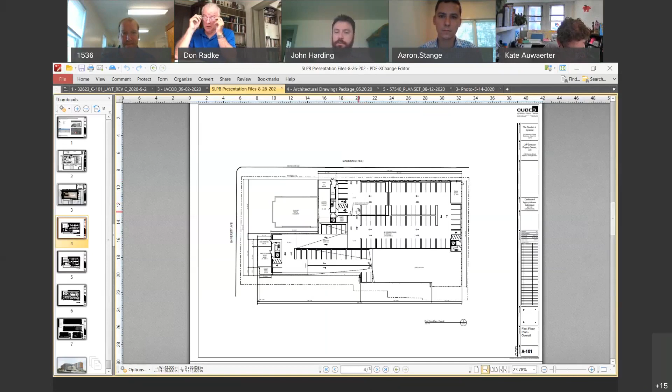I'm just going to take a minute to walk you through the plans and what we've included in the submission, how the building is configured, and talk a little bit about the integration with the sanctuary in this proposed scheme. So here you're looking at the first floor plan down at grade on Madison Street.

It's important to know that the grade changes significantly over the course of the site. The low point is down at the corner of University and Madison, and then it slopes up about 10 feet along University, about 5 feet along Madison. But then in that bottom right corner, it's about a 20-foot grade change from Madison, about 25 feet from the corner.

So there's a lot of grade that we're trying to work with here, trying to make the building function and make a lot of sense in how it's configured.

Obviously the corner of University and Madison is the most critical piece, the most critical viewpoint of this building. It's the historic view of this building, of the existing sanctuary in the temple. So we're trying to do things here that complement that and create new, accessible, but well-integrated entry points, both vehicular and pedestrian.

At Madison Street, right in the corner, you see the main vestibule and the main vehicular entrance. There's about 15 parking spaces as soon as you drive in, for public use, visitor use, short-term drop-off and pickup, as well as 2 handicap spots that have access directly to the elevator, which goes up into the building and directly into the temple space as well.

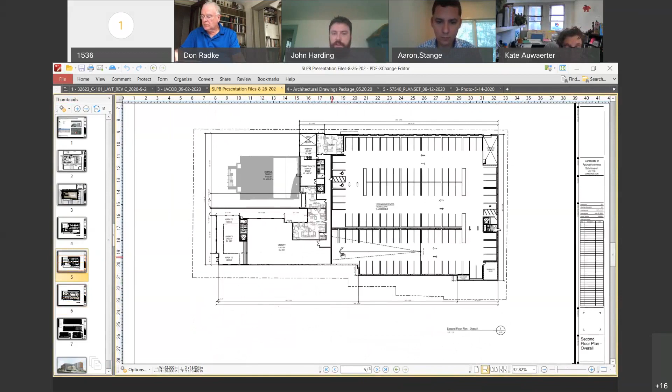Working your way further up—Brian, if you can go back to that second floor real quick—you'll also see, if you zoom in, right where the elevator is, anybody who came from those parking spaces downstairs, those visitor and public spaces, would be able to come up that elevator and come right into the space that is the connection to the temple.

So I think I'll take a minute here to talk about the sanctuary space and why we broke it at this location. There's a lot of thought and investigation that has gone into our reasoning for this location specifically. The biggest starting point is the front door of the existing temple, which is really the critical exterior piece to this building. It's a fantastic formal event that we all agree has to stay and drives what happens from that point on.

So there's the grand stair that comes up, the three doors that go in. There's a beautiful vestibule when you come into that space that will be preserved in its entirety, at least in the plans currently. And then when you go past that, you walk into the religious sanctuary space, where all of the adornments are going to be removed, most of those being taken by the congregation.

But everything will be going, including the pews. And the floor there currently is sloped, and that obviously does not work very well for a multi-use space and for the future life of the space, unless we were doing a theater. So that is something we've been working with.

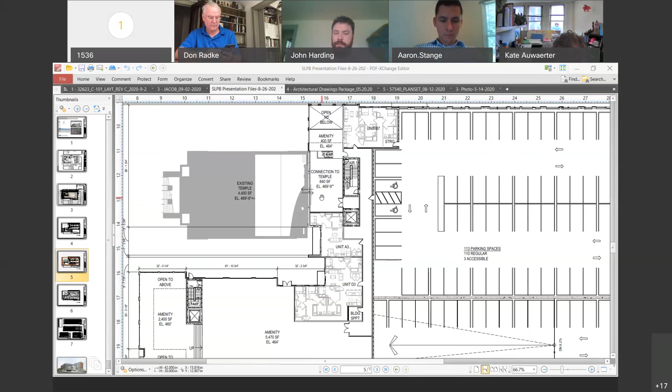So we're really trying to create a very integrated space coming in the front door, feeling that volume connect up and through into that sanctuary space. If there's an event going on, you'd be able to hear that connection, creating a nice procession for people to get from the street, either street, up and into the building.

The rest of the project, as we move on, is primarily residential in nature. There are a few units down on the second floor, and as you move to the third floor, this is pretty typical of what you'd see moving up through the rest of the floors. Floors 3 through 8 are relatively similar, mostly residential on a double-loaded corridor.

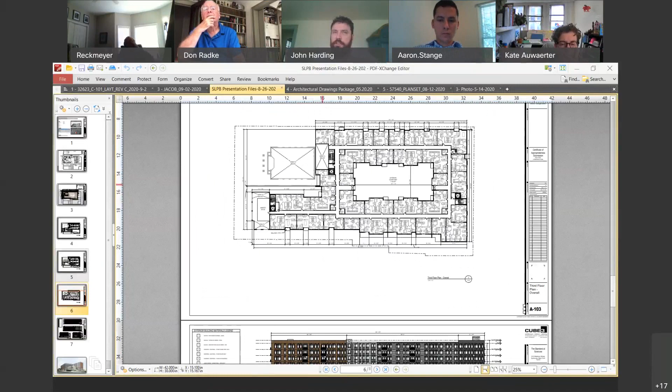On the third floor, there's a raised courtyard in the center for residential use only, and that's where the amenities would be for the residents, whether it's gaming stuff, bocce, maybe a hot tub, that sort of thing out there.

Working down through the elevations here, we've got a pretty simple palette. We've tried to keep it from being overbearing or taking away from the view of the temple itself. We kept a very grayscale palette directly adjacent to the temple, so the focal point and coloration that exists there is really about the temple space, and the rest is a backdrop.

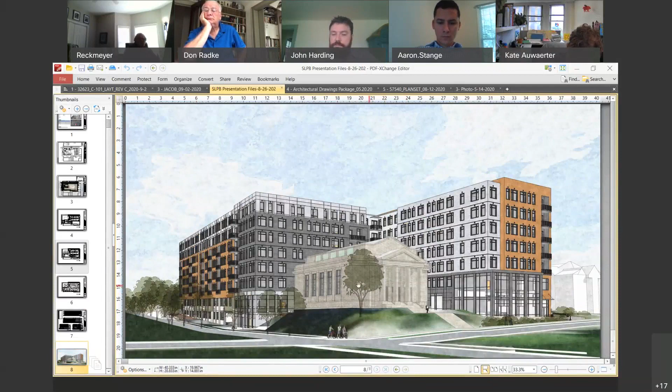We've added a little color with wood tone panels off at each corner, one signifying the entrance on one side, and one adding visual interest along Madison Street. The rest is a mixture of fiber cement panels, metal panels, and some masonry down low, especially on Madison Street. The focal point was making sure this view looked beautiful, kept the formal nature of this building, and gave a backdrop that complements it rather than competing with it.

So I think that's our presentation for right now, and we look forward to hearing your initial thoughts.

Okay, in the interest of time, I know a lot of our board members have to go, and this is a lot to absorb. I certainly appreciate the presentation, and I'm sure board members will need a little time to ponder this. There's the initial question of the footprint of the temple being a bit different, where you've broken it, and the whole discussion about the interior floor and the ancillary aspects of all that.

I'm wondering if the best way to proceed would be for the board to have some time to ponder this. Kate has your contact information, and we can get back to you in an organized fashion. I think right now, with people's time constraints, if we all started chiming in now, it wouldn't be an organized comment. So that would be my suggestion as chair, that the board take some time to really look at this and examine the changes.

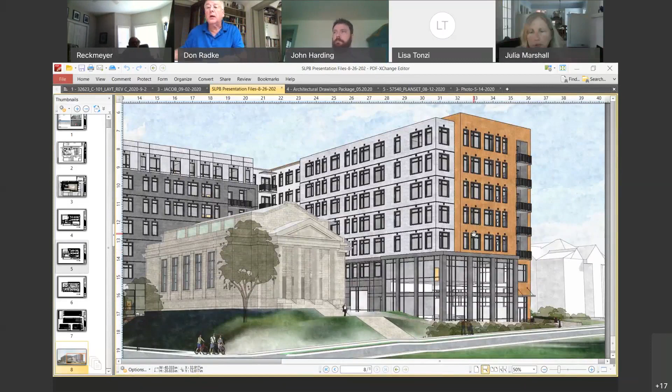Comment, Don: in their next presentation, can they show perspective views from the street, looking down from University up Madison? They have one here, but one of the comments we had made in terms of surrounding the sanctuary building is, what is the street view when you're walking down the street? So a perspective from campus walking down the street would be helpful.

This is a big project, so what I'm going to ask the board to do is put all your comments together and send them to Kate. And if we as a board need to get together to speak about this, we will. From a time frame point of view, correct me if I'm wrong, I don't think anything's going to happen in the next 2 weeks. So we can maybe discuss this at our next meeting at more length and develop an organized, coordinated communication back to you so we can continue working on this.

No, we appreciate that. And as I said at the beginning, our next step is with the Board of Zoning Appeals. And then if there's other conversations through a concept level sketch plan conversation, we'd be more than willing to have that, in respect of your time here today.

So we appreciate it. Well, we appreciate your time and your patience. And I do know that there are going to be - I don't know if I'd use the word significant - but there are going to be comments, and there are some things that we as a board have to discuss.